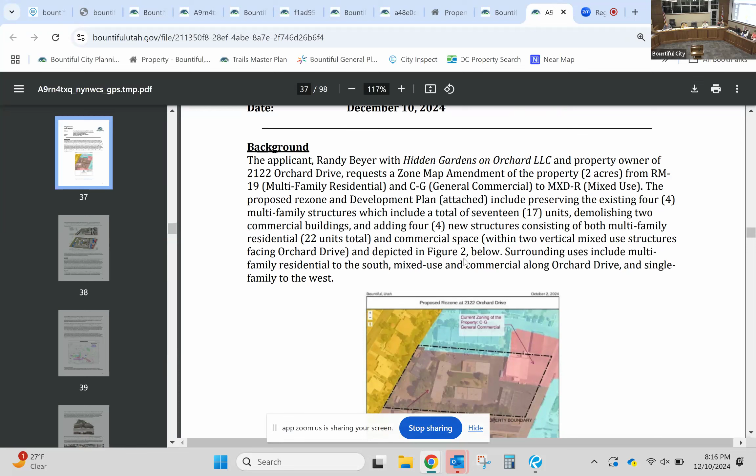Good evening. Our applicant is here tonight for this item. It's a request for a proposed rezone at 2122 Orchard Drive. The property is currently zoned multifamily residential and general commercial. They are proposing MXDR, our mixed-use residential zone, with a development plan which is attached. In their proposal, they are proposing to keep 4 of the existing structures, which are multifamily, and add 2 new multifamily structures and a mixed-use element facing Orchard Drive.

The surrounding zones are pretty mixed, as you can see in the zoning map on the screen. We have mixed use to the north, mixed use across the street. To the west there's some single family in the back, and to the south, some more commercial and multifamily.

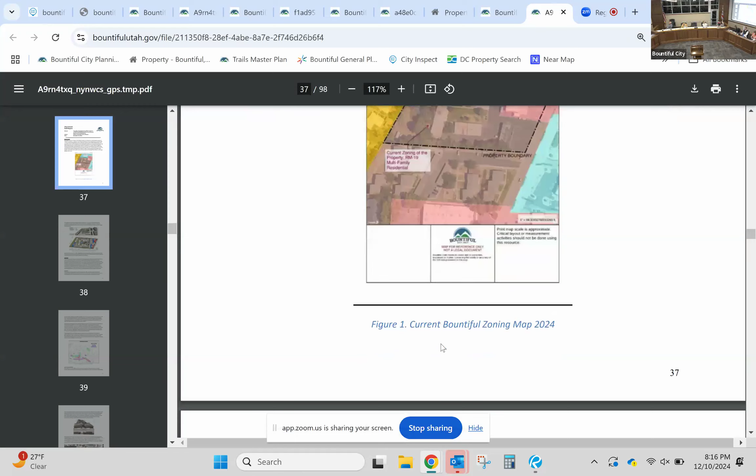The purpose for this application is, quote, to be part of a solution with creating a visually pleasing edifice that contributes to the higher density or moderate income residential need, with close proximity to an identified major transit corridor along Orchard Drive.

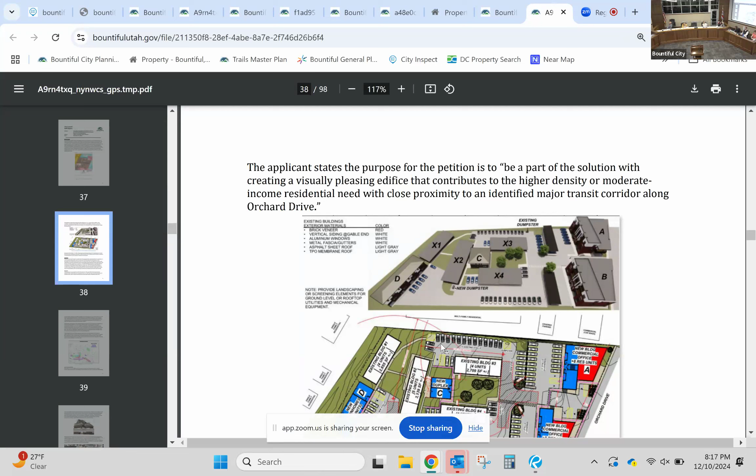During the November 19th, 2024 Planning Commission meeting, the Commission reviewed this item and forwarded a positive recommendation 5-0, with conditions that we'll get to in a minute.

The council will need to consider if this proposal is necessary in the interest of the public and in harmony with the objectives and purposes of the general plan and land use code. Also, the development plan which was provided is a development guide and acts as zoning regulations for this project.

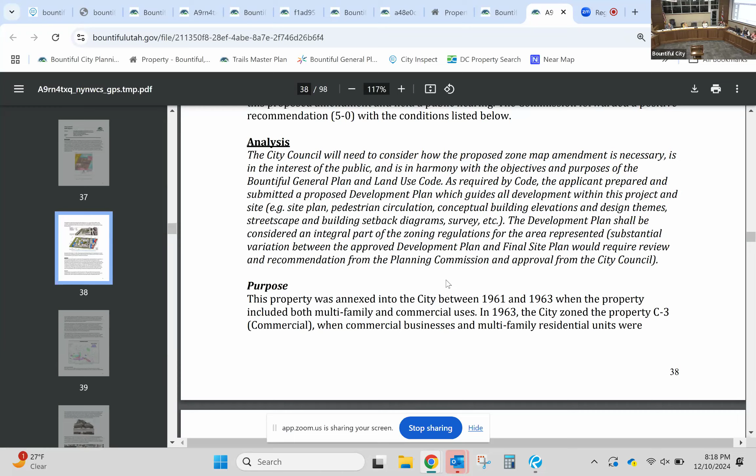Any variation to the project would need to go back through for approval. So keep that in mind, that what you're looking at tonight is what is going to be code for this project and act as an ordinance.

The purpose that staff has found in reviewing the application is that this site suffers from outdated and old buildings. It also has non-conforming uses on the property. Also, the property is in an area where our general plan is proposing that it become a live, work, and play area for mixed-use development.

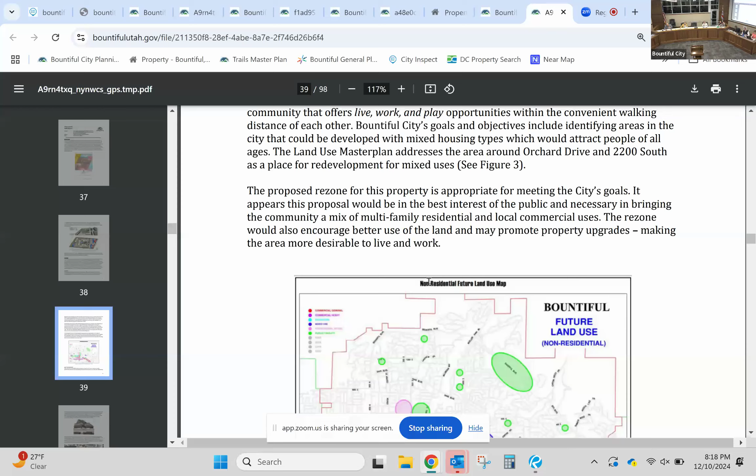And that's found in that 2009 map. So staff finds that this is an appropriate area for this type of proposed rezone.

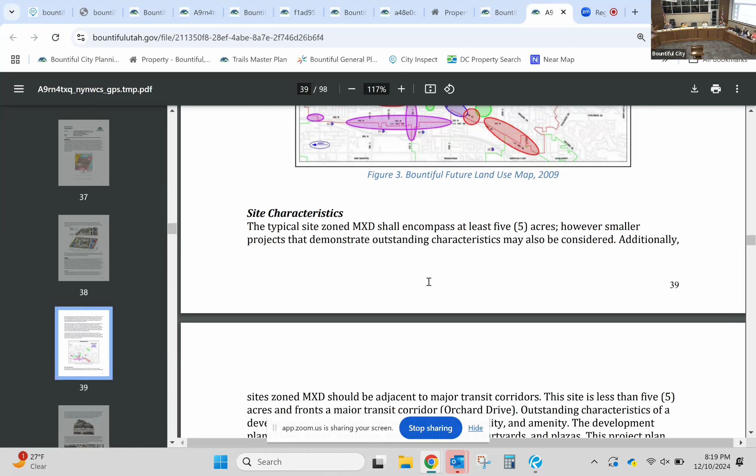Furthermore, going into the site characteristics, this property is less than 5 acres. The code says that smaller projects that demonstrate outstanding characteristics may be considered. This one is along a major corridor, so that does qualify.

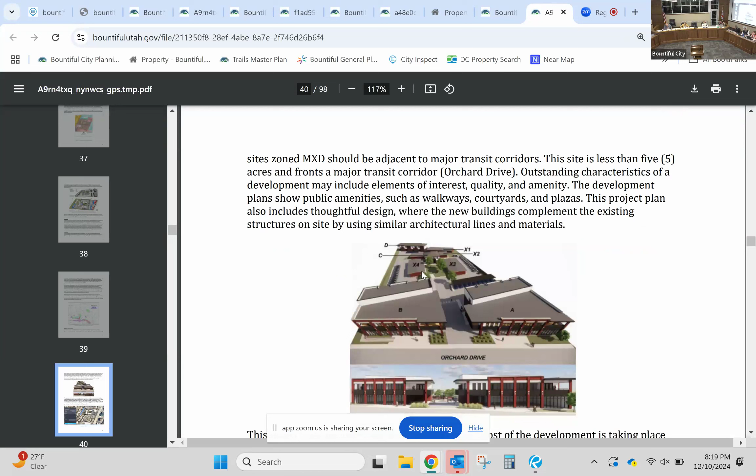Also, the outstanding characteristics are that they have provided some interest, quality, and thoughtful design so that the new buildings blend in with the existing, and they've provided amenities such as plazas and connections throughout the site. We, as staff, have reviewed it with the commission and found that some new elements should be added as a condition of approval, such as benches, tables, or chairs, to be more inviting.

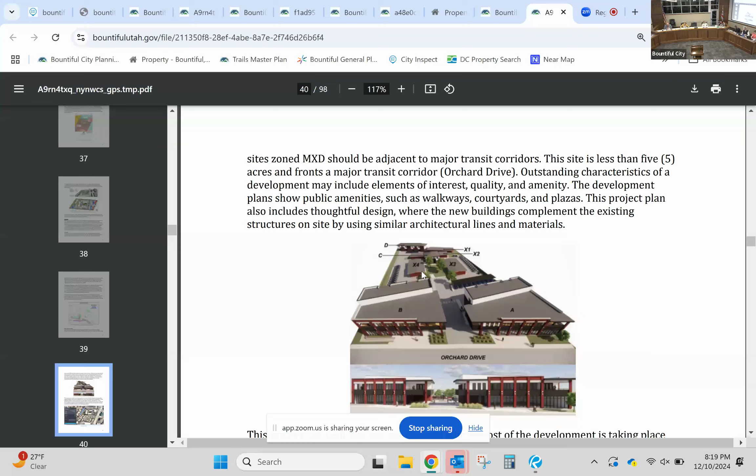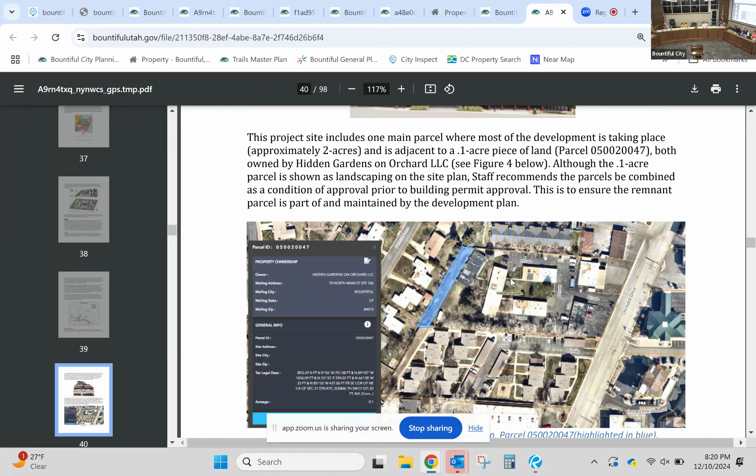Another condition that we've talked about with the commission was there's 2 parcels for this property or project, and combining the 2 parcels, the one to the west here in blue is just a small sliver of landscaping that needs to be part of the project so that it's maintained by the development plan.

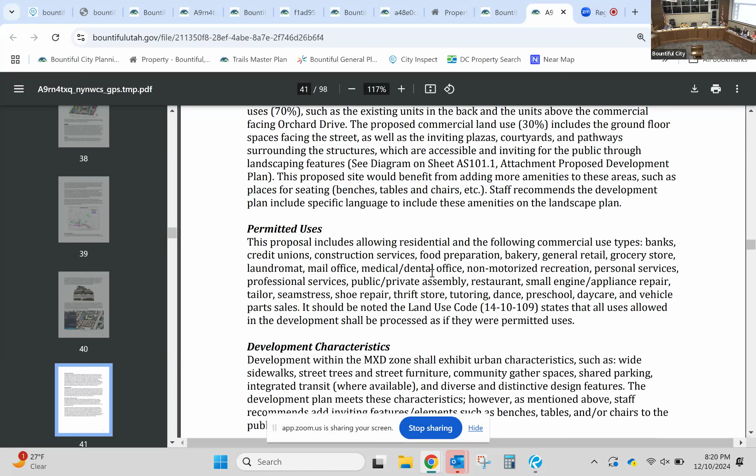Moving on, the uses are listed in the packet that would be permitted in this zone. Various retail, services, etc. I won't go into detail with those.

So talking about parking, this project required a parking study, which the site does provide enough parking stalls for the small office and multifamily, which are proposed. Staff recommends that if any new uses were to come in, if the parking demand goes up, then we would require that we review a new parking study for the new uses.

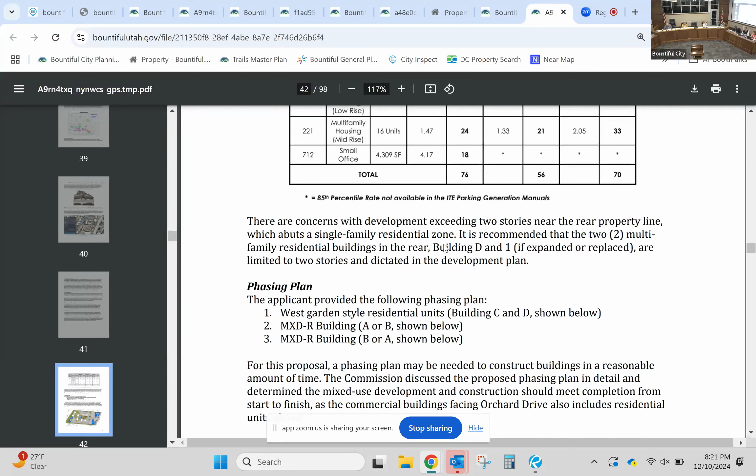Also, there's concerns with the development exceeding 2 stories near the rear property line where it abuts residential properties. So it is recommended that the 2 multifamily residential buildings in the rear, building D and 1, if expanded or replaced, are limited to 2 stories and are dictated in the development plan.

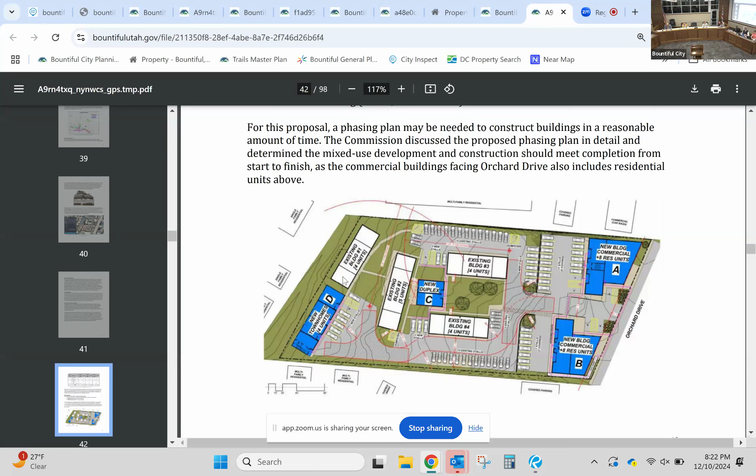With the phasing plan, the applicant... Amber, can I ask you while you're on that point? Yeah, for sure. This lot has some slope to it, yes? So from Orchard Drive, the buildings that would be at the far western edge, with these ones here? Yeah, so would they appear from Orchard as though they are 1 story, even if they are 2, or? I'm not sure about that, how they would appear from Orchard. As long as we're talking about that, I had a question about D and 1.

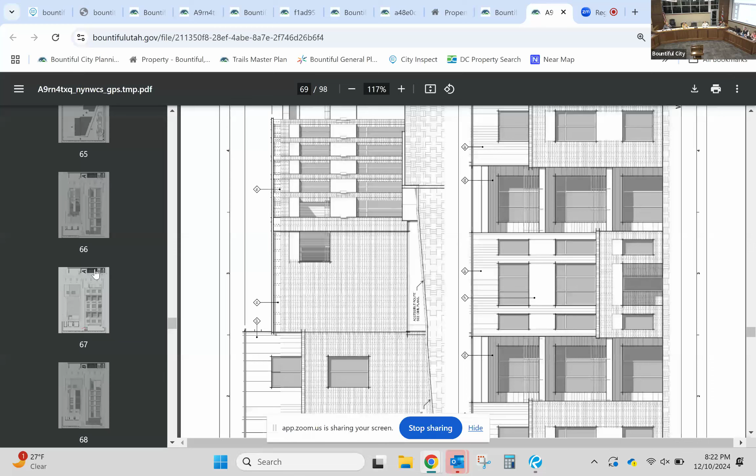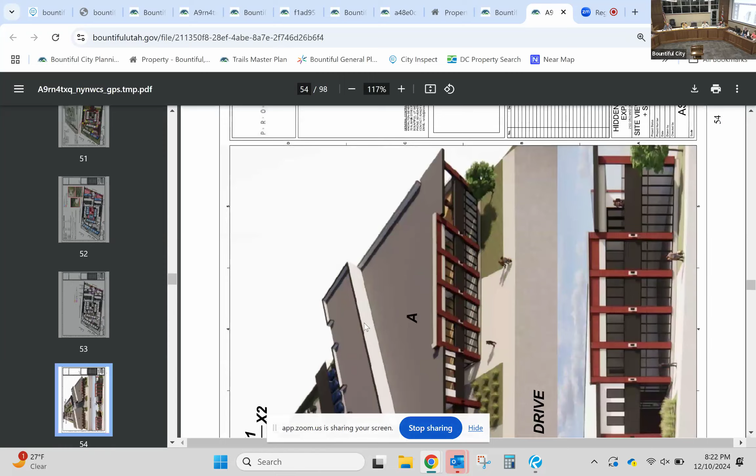Let me go to the image. If you look on page 54, there's a perspective from Orchard Drive that you can see down the driveway, and you can see that new 2-story building in the background. It doesn't look very tall at all.

No, I had a couple of questions just about height, because the recommendation is that those two buildings, D and 1, when they get built, would be restricted to 2 stories. Yes. But we don't set a height on that. So the reason we didn't is because the height is actually 35 feet maximum for the zone as a default, and that's what we allow in our single-family residential zones. So the motion was just that it was 2 stories. There was no indication of the height.

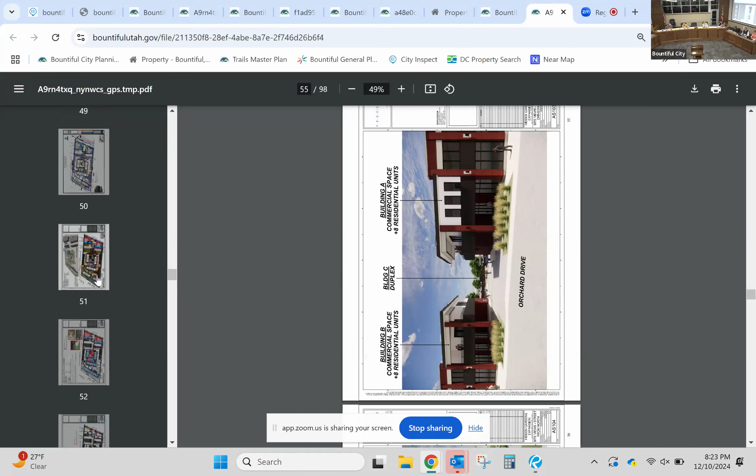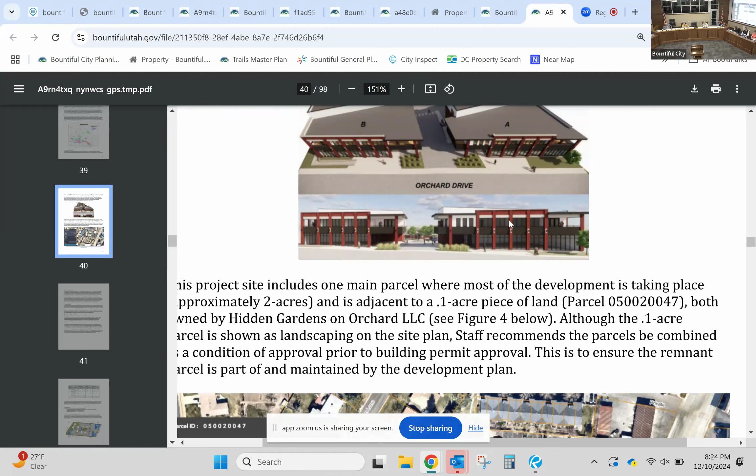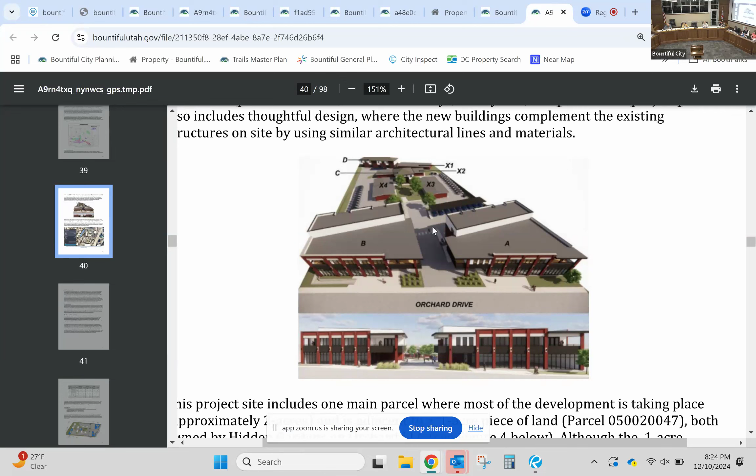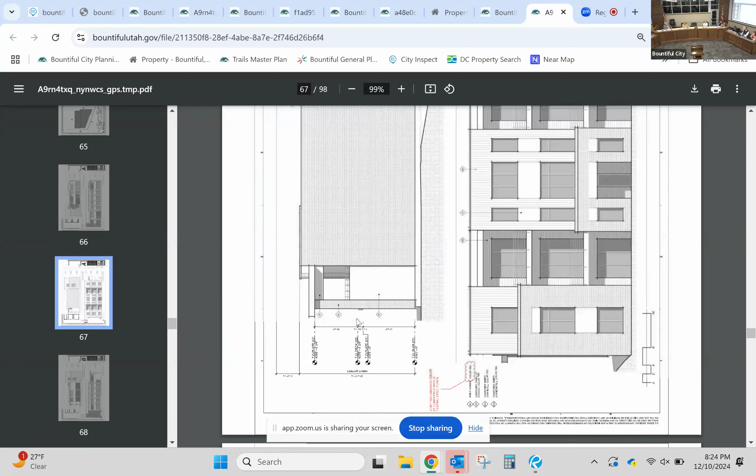Right here. Let's see, this is the front. Is it this page too, right here? Oh, it's blurry. 37, from, let's see. I may be able to answer some of these questions, Mr. Astorga, please, if I may.

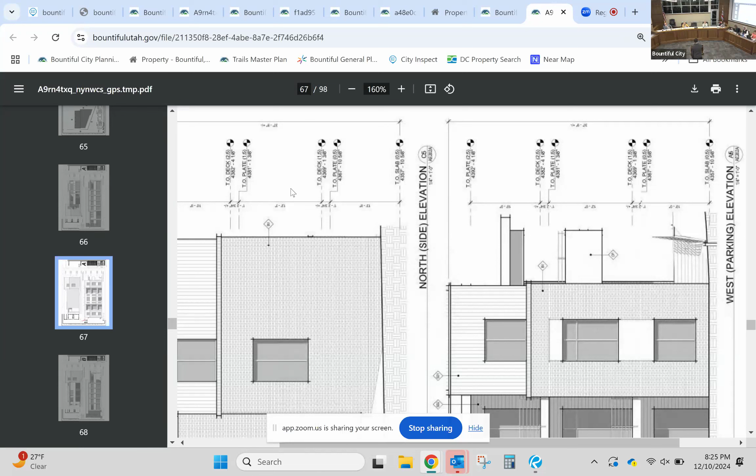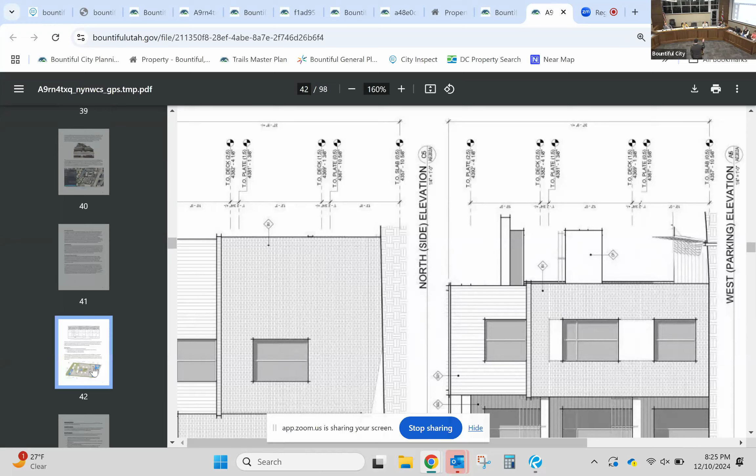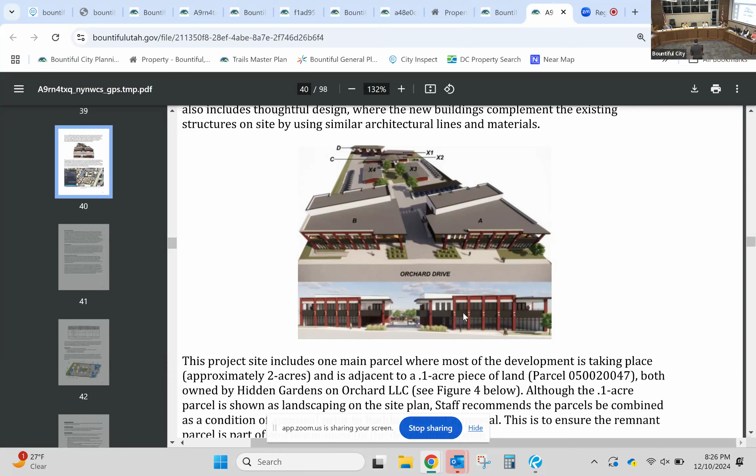If I may, the mixed-use zone is very unique, unlike all of the other districts, in that through your legislative authority, through this zone change, we're in essence creating specific code for this specific property. With that said, the Planning Commission didn't feel the need to be specific in the height parameter by assigning a specific foot provision, in that they felt more comfortable limiting it to 2 stories. Furthermore, the buildings on front would be limited to this development plan, which is approximately 35, 36, 37 feet. The way we measure height per our current code, regardless of zoning designation, is that we take it from average grade. So if you're worried about the buildings along the front, they will meet the 35. But keep in mind that should this zone change be approved tonight, this development plan becomes the blueprint, no pun intended, for the site plan review process. So they are not able to squeeze in another story or not comply with this. As Amber indicated at the beginning of her presentation, if they want to do that, they have to come back through the legislative process, through the zone change, and amend the ordinance. Did that help out a little bit, or did I further confuse things by my comments?

I think it helped, I hope so. Can I help as well? I'm just wondering if somebody with better vision, maybe on page 68, it shows an actual elevation, like a height. Can somebody just, okay, Lloyd.

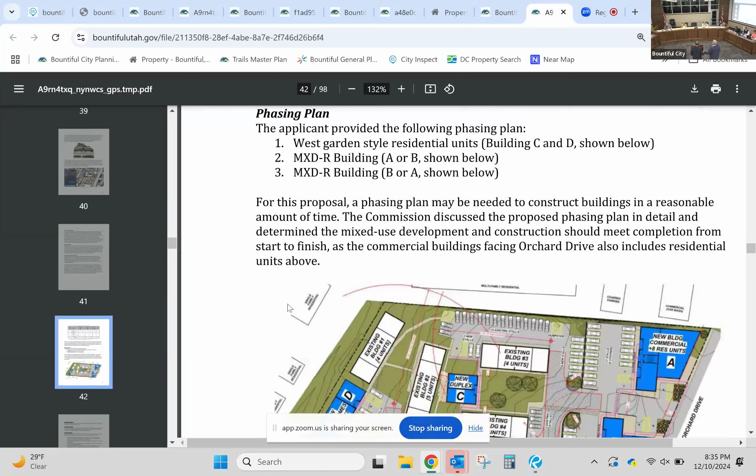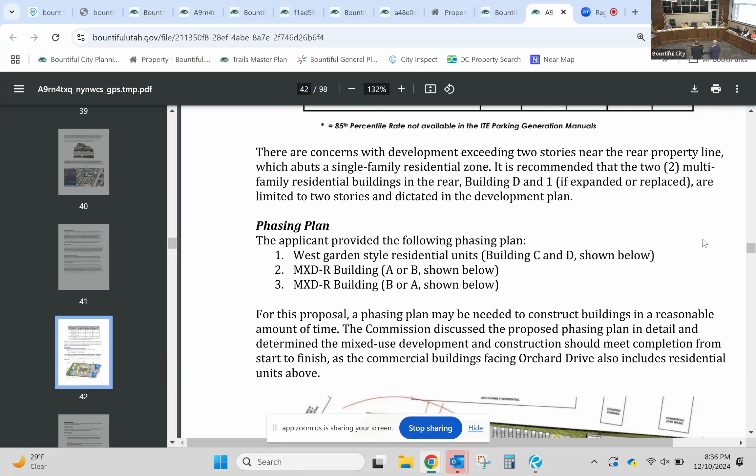One other detail I'd like to add is there was a phasing recommendation by the planning staff to help guarantee the commercial portion of this project gets built up front. The project to the north I mentioned earlier had a commercial component that still remains unbuilt to this day. The Planning Commission felt that given the constraints of the site, they were going to recommend alternating between residential buildings in back and commercial buildings up front. The Commission seemed fairly united that residents remaining on site during construction would be better served by completing the two rear buildings first, then the two buildings on the street. It was also discussed that the residential units in buildings A and B on Orchard Drive would guarantee those buildings get built too, so those parcels don't sit vacant like the one to the north. Did I explain that adequately? So the phasing proposed by the developer is the one that won the day during the Planning Commission discussion, and there's no requirement that they be phased alternately front and rear.

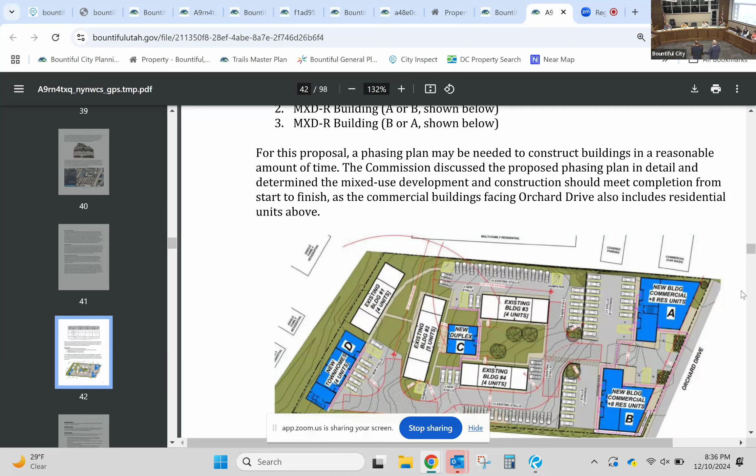Could I ask a question? Where Building C, sorry, I was erroneously calling it Building 1, the duplex, is that in the middle? Is there anything there right now? No, nothing. So that will just be taking a portion of the garden court area. If you want the absolute truth, the idea was that some of these garden-style townhomes are not the greatest looking, so our intent is that the duplex becomes the focal point. As you turn down the drive, you see that duplex, and it helps tie in the continuity between the buildings at the front and the buildings toward the back that are being added. So that was intentional for that reason.

Do you have something against single-story unreinforced masonry with low-pitch roofs? No, not in the 70s. Thank you. Well, they're still here, could I ask a question? Of course. Okay, but I only know because it's you. Thanks.

In the plans it says there's a parking study, and it talks about parking. Then looking at some of the renderings, the parking appears covered, but maybe it's not going to be covered. I just wanted to clarify that, since in one of the renderings it appears covered.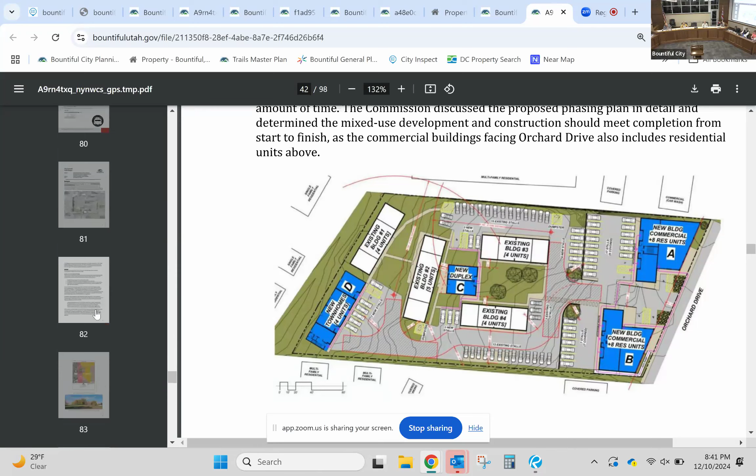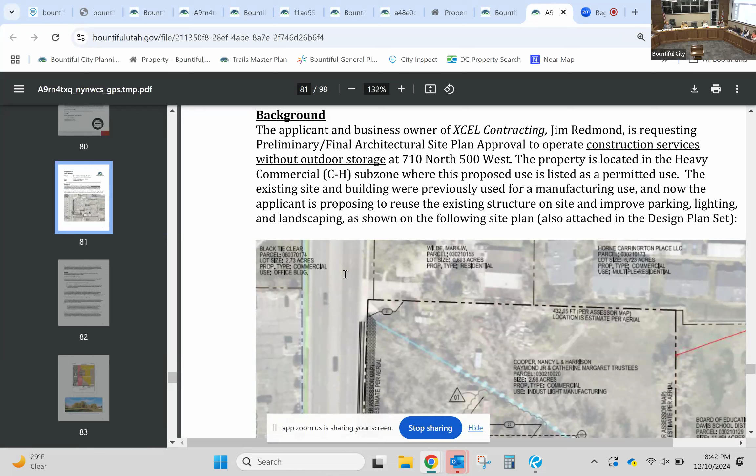We move on. Number 9 also looks like it goes to Ms. Corbridge. Yes, I've got it on the screen. This is a proposal for a change of use, which comes before you because changes of use in commercial zones have to go through a site plan review. Simply what's happening with this site, it used to be a manufacturing use. Now it's going to be a contractor office and indoor storage. They're just making some site changes such as parking, landscaping, lighting, and a dumpster.

In this review on Tuesday, December 3rd, 2024, after a long debate about whether the existing vegetation meets that solid screening device requirement, the commission forwarded a positive recommendation, 4-2, to the city council to approve the site plan with conditions. Those conditions are: one, maintain existing vegetated screening along the east property line; two, remove all junk and debris from the property; and three, meet all staff review comments. Do you have any questions for staff?

Here's your 4-2. What questions do you have? Okay, I have a couple questions. First, I'd like to say I'm glad to see this is going to be a commercially viable piece of property put to good use. The question about the- sorry. I'm just going to ask about the 4-2 vote, could you enlighten us on that?

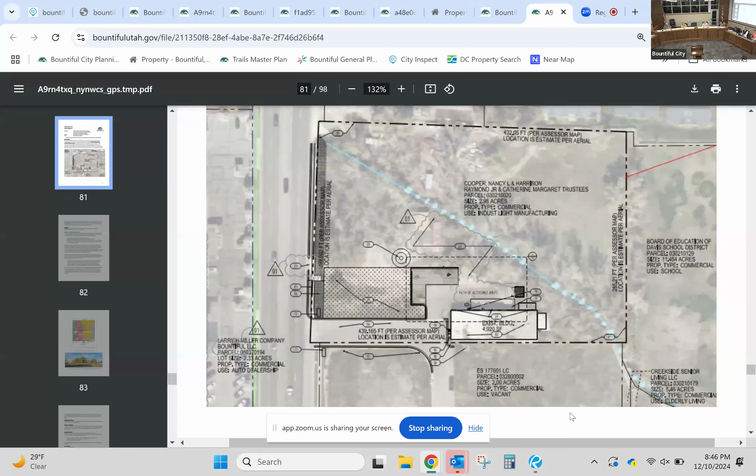Has there been a screen like this, Francisco, elsewhere, where the code does not say vegetation, but that's what it is here? We have not come across this, at least in my 5 years. I don't remember coming across a similar project where we utilize this method.

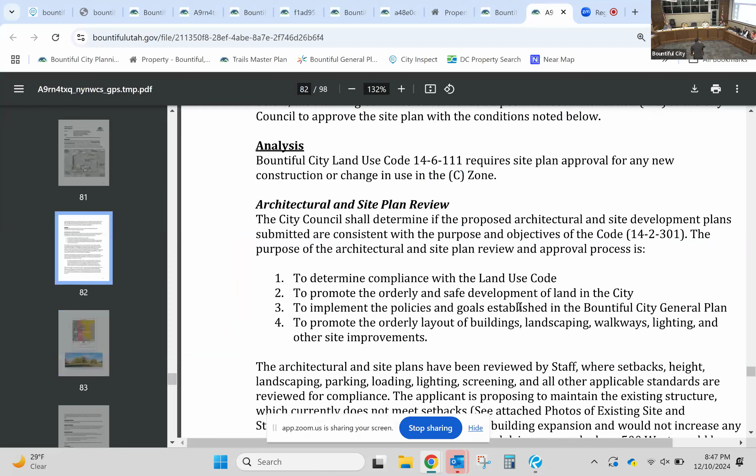What Amber's got on page 83 is the screening that ultimately was considered as solid by the Planning Commission, and that was part of the Planning Department recommendation. Amber, within the same report, you have the actual code language, don't you? Right here, if you don't mind pulling it up - right there, a solid screening device.

That was, I guess we could say, the stretch. The commission, the 4 votes for it, ultimately, as Councilmember Higginson indicated, they treated it as more of a legal nonconforming situation. As you just barely said, you were right on, and the commission felt that they're not making the situation any worse.

Could I say one thing as well? That condition now, number 1, says maintain the existing vegetated screening along the east property line. In the original staff report in Planning Commission, it said if the vegetation is reduced, then the property owner or the project tenant would have to come in and put solid screening in. So there was that backstop, but then Councilmember Bott said, why in the world are we going to police that? They're not bringing anything else.

Again, it's that same theme. We're not requiring that they tame the wildland. Why are we going to require them to spend money on a fence that is not necessary if they're not increasing a non-compliance at the building where they're actually using the property? So that was the theme of the night. That part was removed. If the vegetation falls below what is considered solid screening, then we're going to have to revisit this down the road. So the Planning Commission decided that they were kind of feeling their oats that night. They decided that they were going to take charge of that condition and remove that phrase. So we probably needed Brad there to keep us under his thumb.

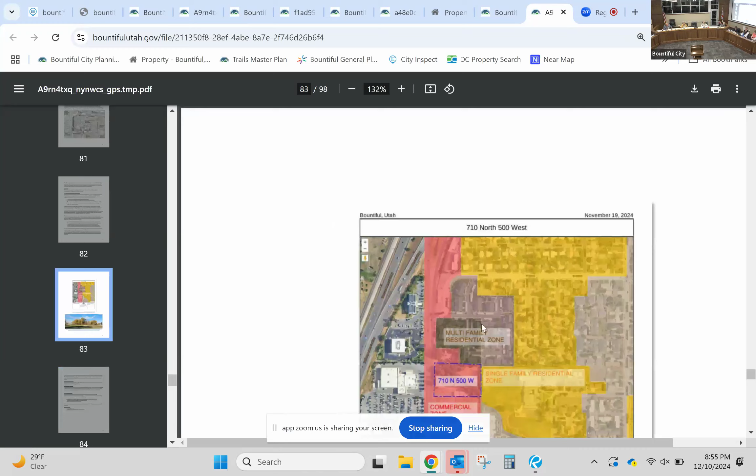So it was hard to tell from the photo, is that intact, contiguous for that entire length? Okay, this gets a little covered with vegetation there. So the bulk of the trees are on the applicant's property side. I believe all, of the trees are. The grass is on the school side.

So is this taken from the school perspective? Okay, is the fence on the applicant's side? The fence is owned, or it's on the school side. The fence is on the school side.

So how far back is the tree stand? How far back on the property? Well, just from the property line, maybe 10 feet? Some of the canopy overhangs the school district property, some of it's back a few feet. I think you can see it there in that overhead shot. Right here, that's the fence, and there's the property line.

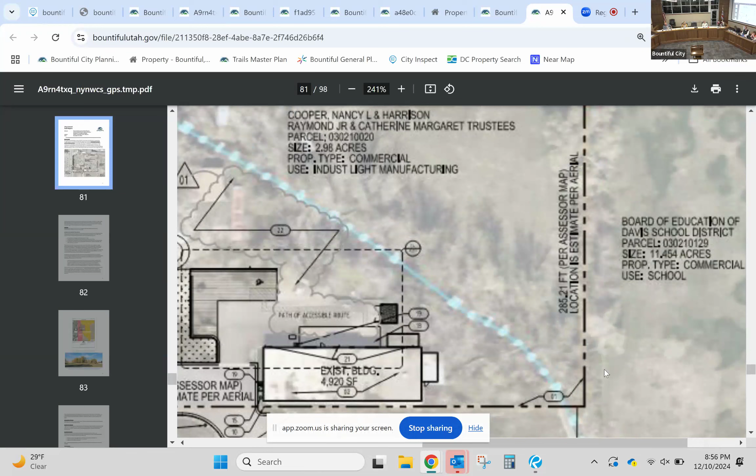And we're protecting most of this because we know that there is no canopy or vegetation on the property to the south for whatever development comes in there.

Or would we also want them to shield commercial? Commercial use doesn't require the screening. So it's either the residential use or zone that requires the screening be installed.

How did I do, Francisco? You passed the first interview if you wanted to work.

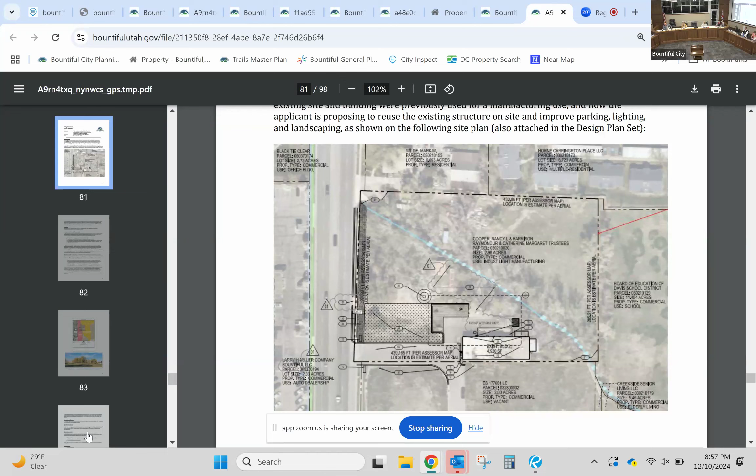Okay, one more thing. So the language proposed is to maintain the existing vegetated screening. I'm just wondering, because this is unusual, maybe we have an alternate motive to keep the wild tree canopy going there. It is providing a screen, but I have a tiny bit of concern about at what point do we say it's not being maintained. What does that look like when a wall has come down or fencing has come down?

We're not really sure what we're agreeing to here. What does this look like if we move forward with this, what is maintenance? I know you were saying we decided not to be overly prescriptive, but the code still applies.

That was one of the reasons Amber included that photograph, so if something happened to that wild tree canopy - I like that term, by the way - if we were able to see through it, we could compare the photograph with the current situation, and then my department could act on it and say, hey, there was a windstorm, these trees came down, you got to do something, you got to meet the code. So that's how we would treat it.